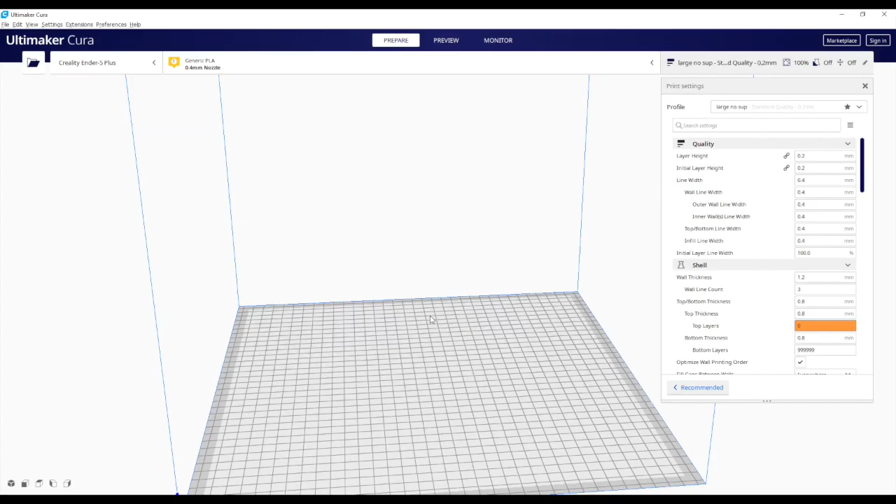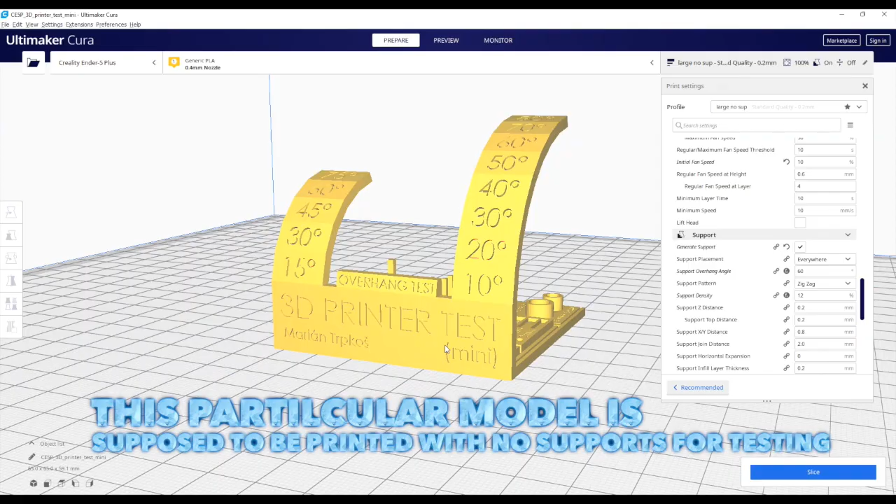Today we're going to learn about support materials and what is a support material. Alright, first we're going to open this test right here. So this is a file I got off Thingiverse. It's basically something your 3D printer can print out, and you can just test out stringing, supports, and I'll go over what everything is in a few seconds.

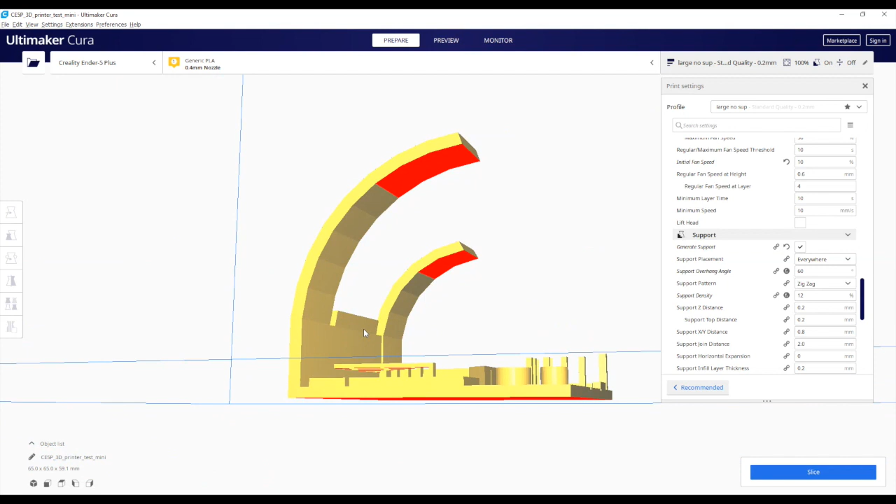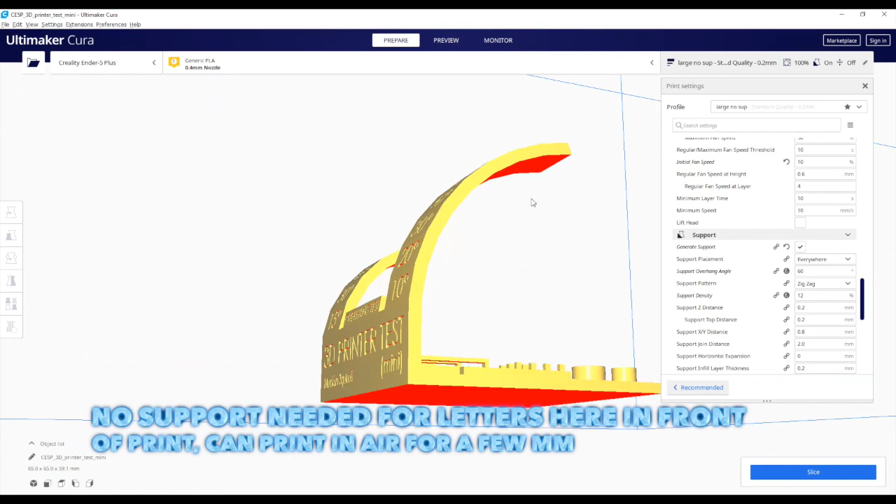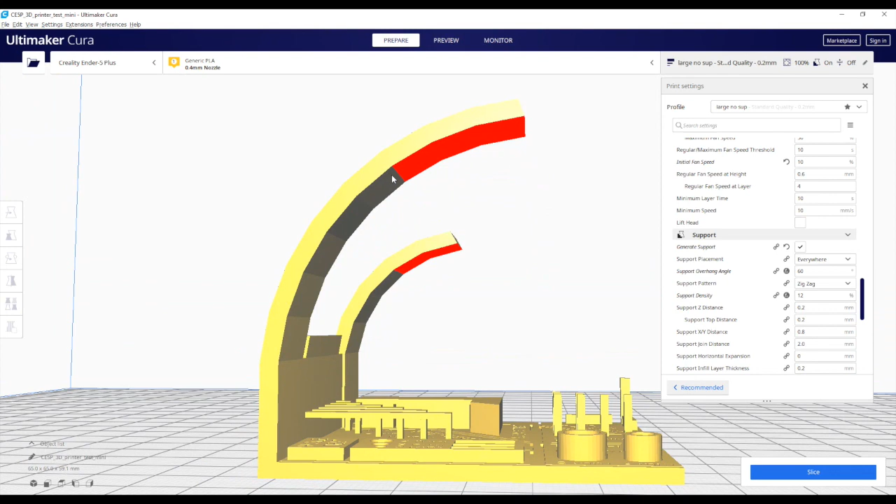So basically the 3D printer is pretty impressive. Like the one I have, the Ender 5 Plus, it can actually print up to 60 degrees right here in the air, which is pretty cool because all of this doesn't need any support material. After 60 degrees though, I've noticed that it does start to fail and warp and disfigurations, and basically it's printing in the air. So it's not getting attached to anything. Here it's getting attached to the last layer, but in the air it can't really do that.

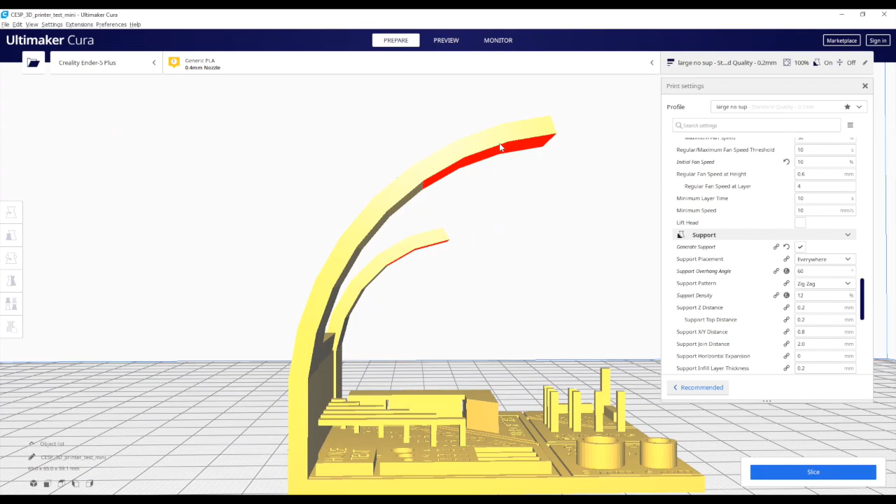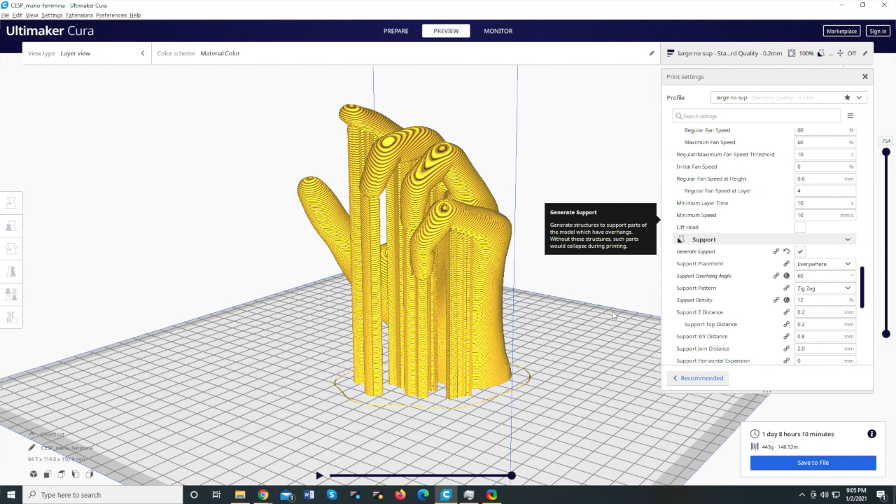So basically you need support material anytime you're printing something that has nothing under it. So basically on a helmet that would be the ears. There's nothing on the side of the ears, so it's going to need support material. On a hand, let's say it's facing fingers up and then just bending them slightly. That'll be the support material I show in the picture. For each of the fingertips, they're going to be in the air. Then that's what support material is used for.

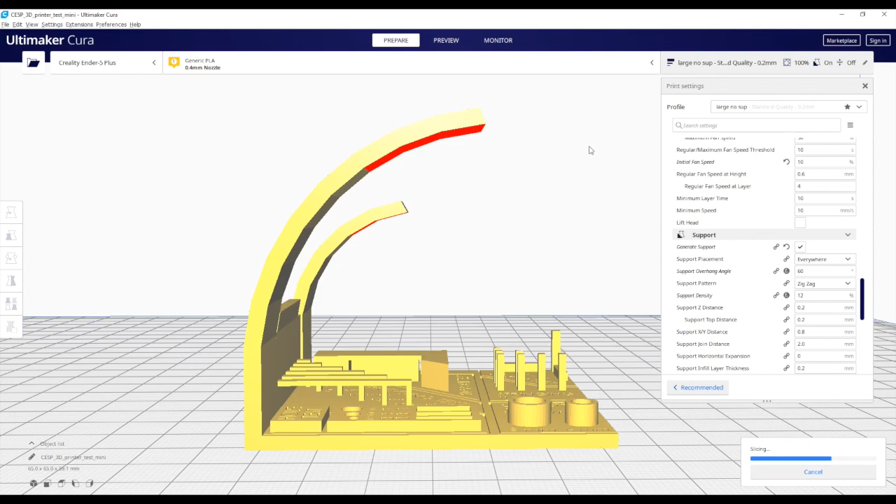Where else would you need support material? Basically, a lot of the prints have support material. But basically what support material is is just supporting the layers that have nothing directly below them, so it can print nicely. So we're going to go ahead and show you exactly what they look like once this is set up. Preview. So this is Cura showing you all the layers it will print in fine detail. So each one of these yellow lines, ignoring the shadows, is each layer.

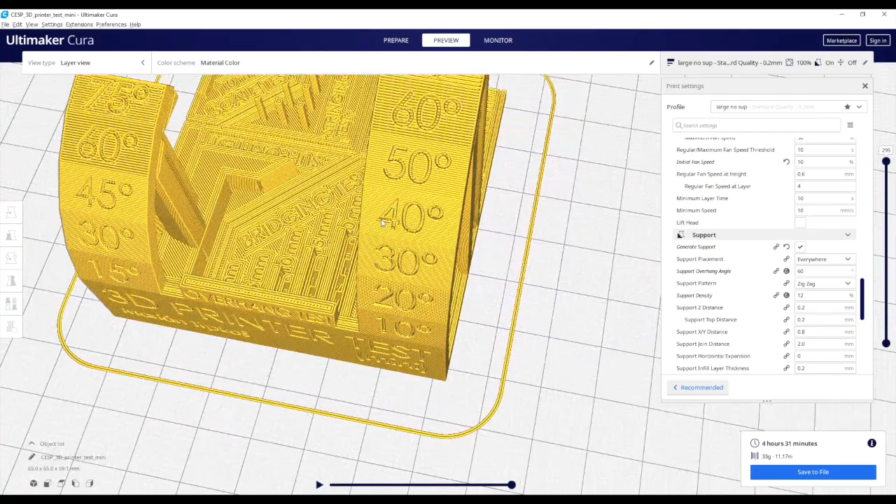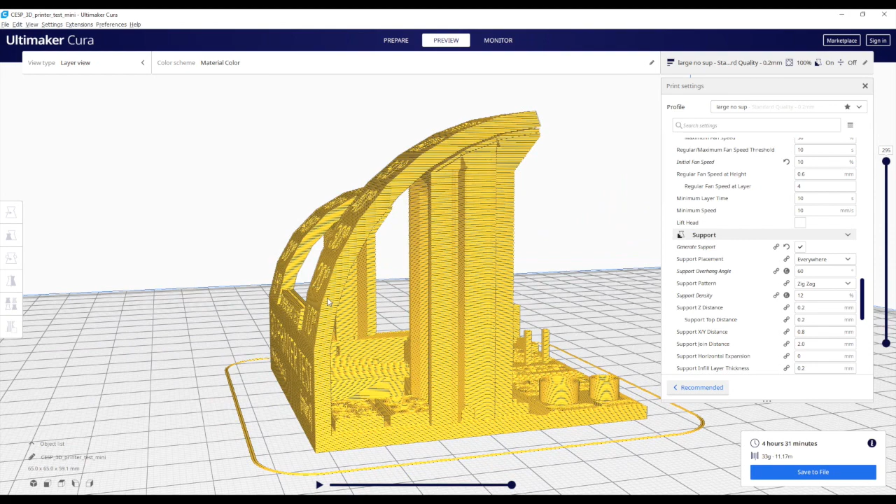So right here you can see that they've nicely put the angles at which this is in the air, compared to straight. 0 degrees would be this straight up, and then off to a little bit it's 10 degrees, 20 degrees, 30 degrees, 40 degrees, 50 degrees, and then 60 degrees. So basically these are the angles away from this 90-degree invisible line that goes straight up and down. So anything after 50 to 60 degrees, you're going to want support material.

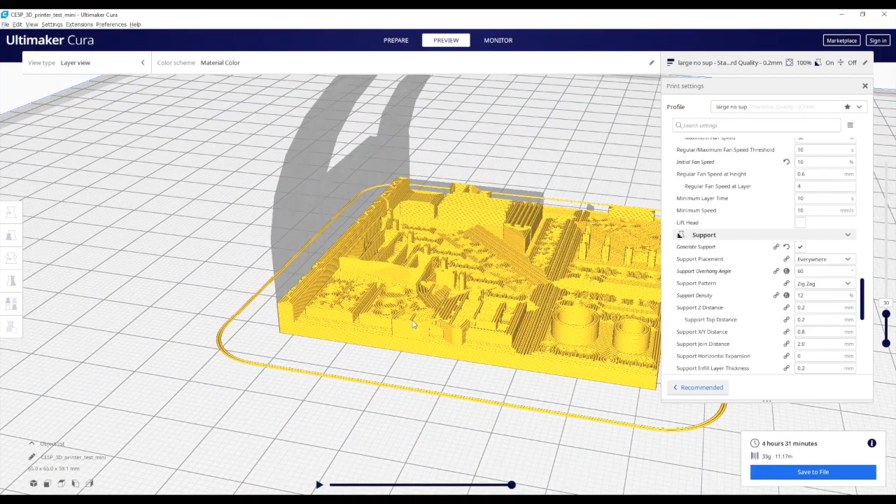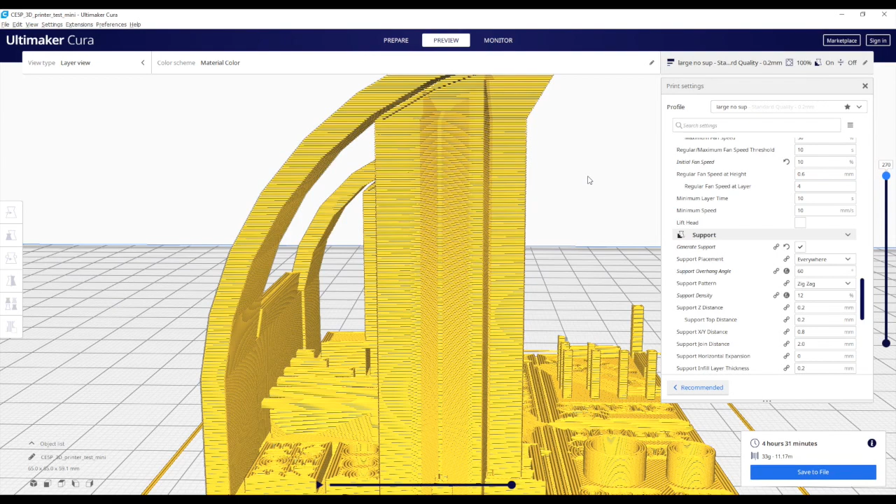And let's take a look inside the support material so you can better understand how it's helping the 3D model. So right here you can see the support material is really just a hollow shell with some lines on the inside to give it some rigidity, so the layers on top can actually print on something solid. So basically what happens is your model gets printed at the same time as the supports, and what the supports do is, like they're called, they support the model on any parts that have nothing directly under it.

So basically right here, if I deleted supports, imagine this was gone. Each one of these layers would be connected to nothing. And what I mean by that is that the layer I'm pointing at right here would start printing in the air because there's just nothing directly under it. So basically gravity would win here because the material is so thin, and it's going to start printing in the air because the last part that had some good adhesion was at this 50 degree, almost 60 degree angle from this line. So basically support material lets your printer print things in the air. Pretty impressive.

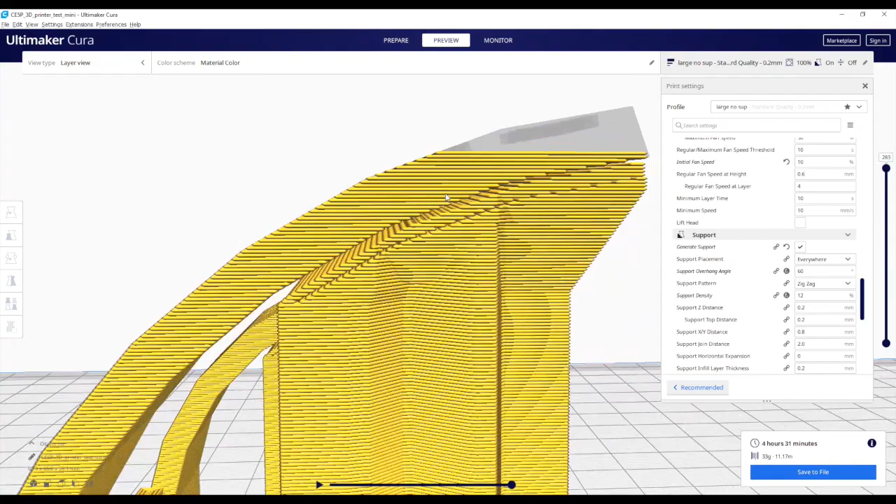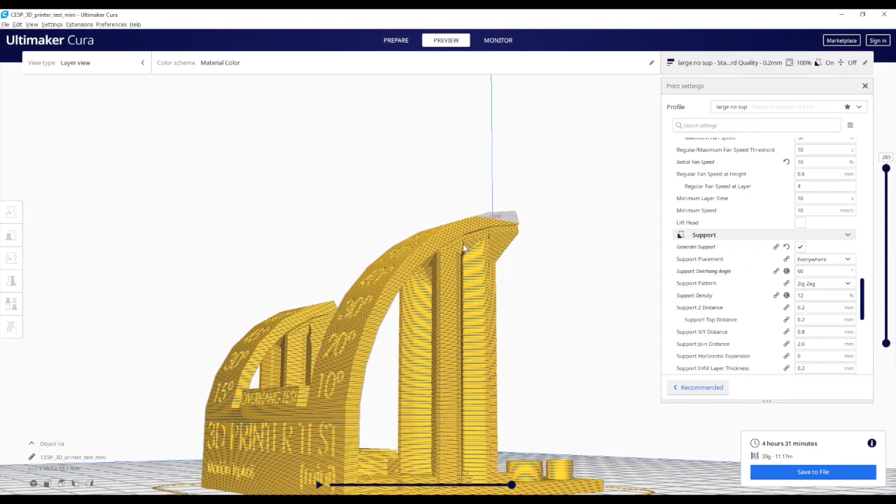We're going to go over some settings because the support material is also something that you guys will probably hate when you first start out. Most of the time when you get started, the support material gets so stuck to your print that the print becomes unusable, because you try to rip the support off, and the whole print that you actually wanted to display or use gets ripped off as well. So we're going to go over a few settings that can probably help you out with that. Alright, so right here you notice there's a little gap.

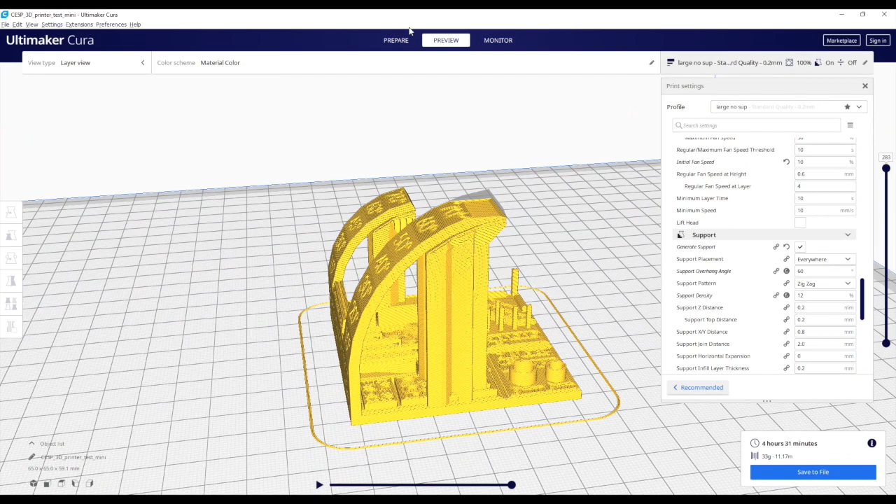This gap is 0.2 millimeters thick, and I know it doesn't look like that here, but I'm really zoomed in. This is actually a really tiny print. But yeah, let's go back to before the preview. So right here you can see this is the top of the supports. What you don't want is your supports to weld themselves onto your model.

So here we're going to go over the settings. Here in the Cura settings, I'll make another video going over all of them. They're pretty self-explanatory, but there are some special ones I want to talk about in the support section. My next video will probably go over all the settings, but this is something most people don't take into account when they're printing their first prints.

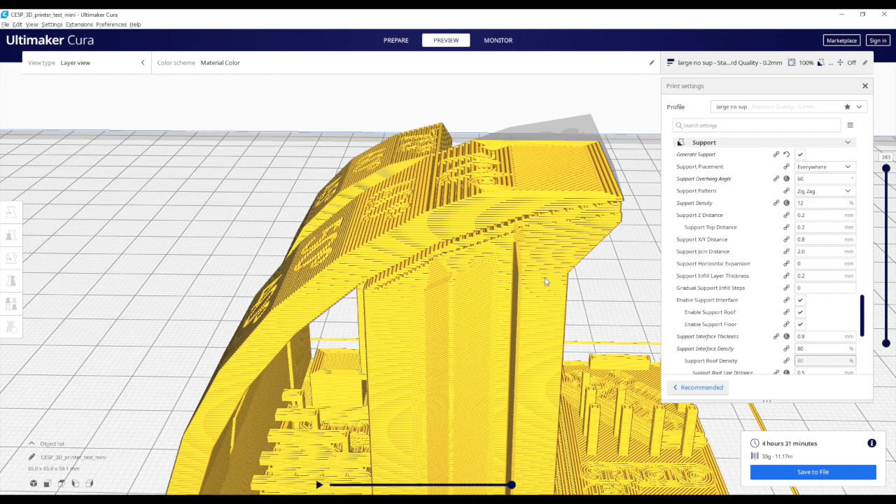Okay. On the supports, I have some extra lines just from the additional settings right here, because I like to be in control of a lot of the stuff in Cura. Once you fine-tune things, you can make profiles, and each of these profiles can go for small models, large models, so you don't have to really mess with them more than once.

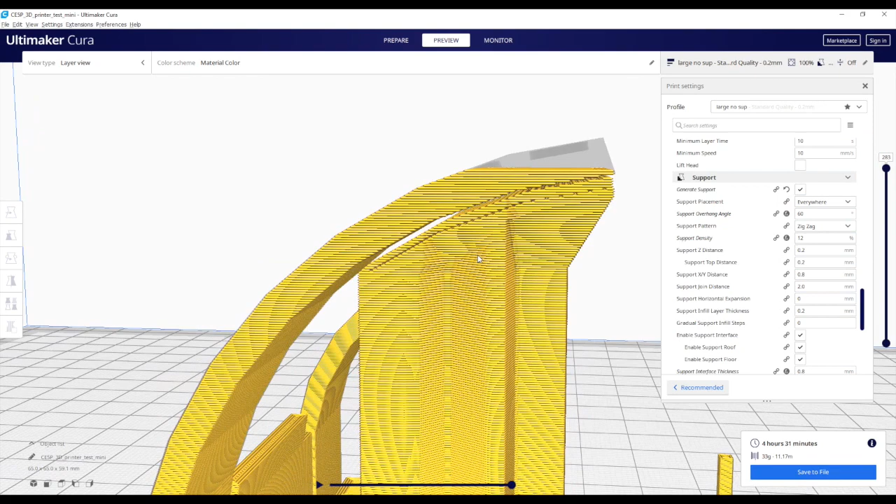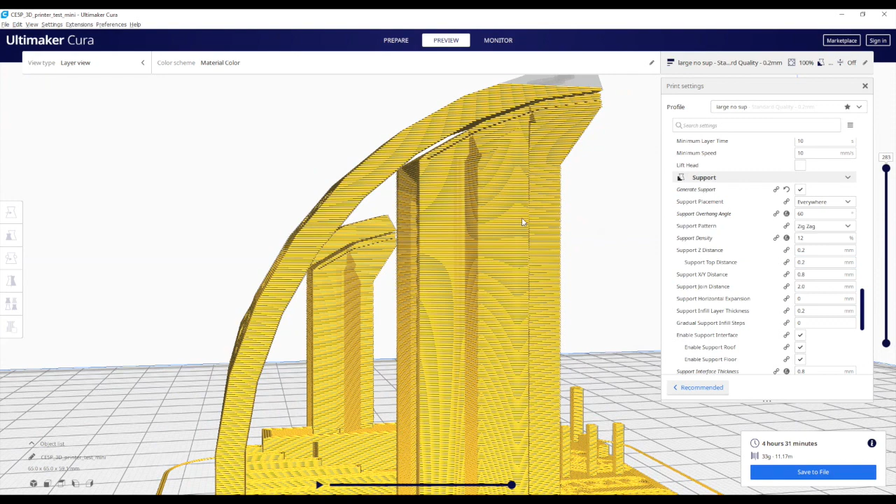So, support. Generate support. On some models, and I'll display one in a few seconds over Cura right now, you don't really need support material because the whole model has angles in the air of less than 60 degrees. So basically, how you find out if your model can be printed without supports is you go to support and change the overhang angle to 60. Once you do that, you'll notice if your print needs support material or it doesn't.

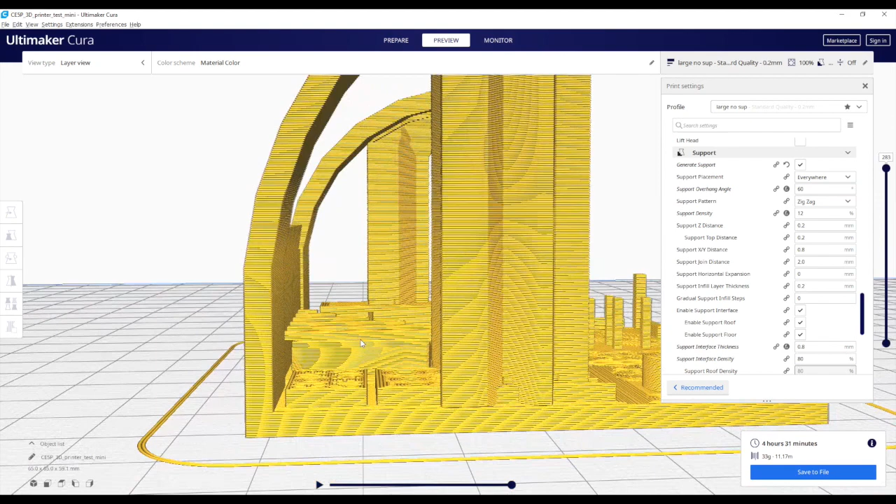For example, let's say I lowered this to 40. Slice it one more time. Remember, our supports were here at the 60 degree angle mark. Now you notice that there's more supports. Why is there more supports? Well, you just changed the angle to start supporting material to 40 degrees.

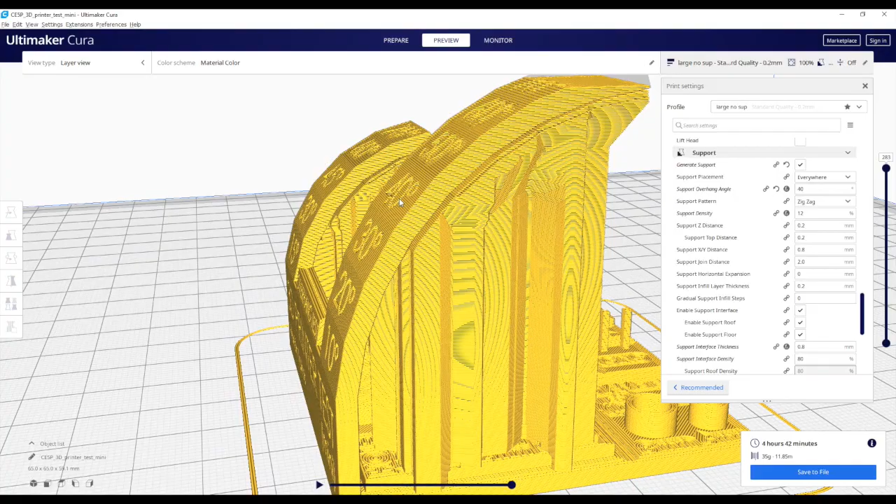Now here, you don't really need support material, and you can print this test without support material just so you can see what your printer is capable of. For most printers, I think it's about 50 to 60 degrees that you need support material after that, but they do pretty fine at 40, 50, and maybe 55 degrees. So basically, that's what your support angle does. It tells Cura where to put support material. So let's go back to 60.

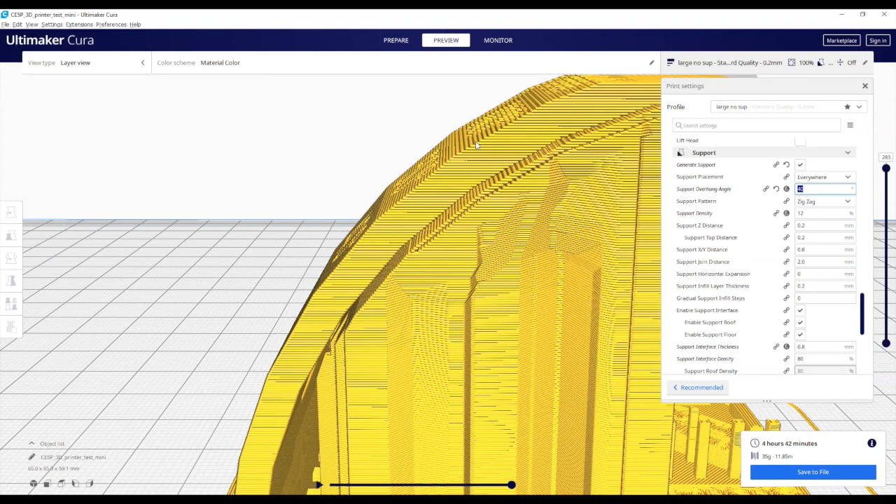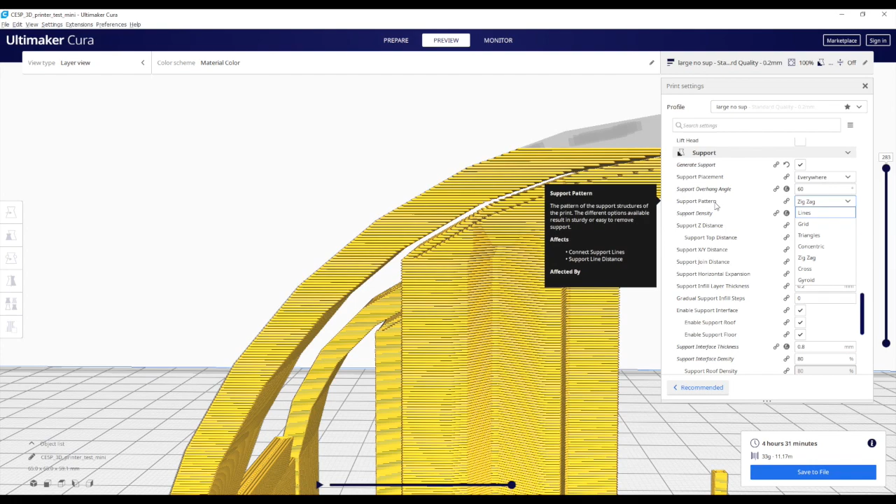Alright, so we're back at the 60 degree mark. Let's go over the rest of the settings. The support pattern doesn't really matter. This is the pattern that goes inside your supports. If I cut it again down the middle, see these lines? It's just the shape of these lines. Zigzag just means it's going up, down, up, down. I noticed that's the fastest because the motors move more easily in one direction than creating a spiral. You can experiment with your own, but I've always used zigzag, the default with the support material.

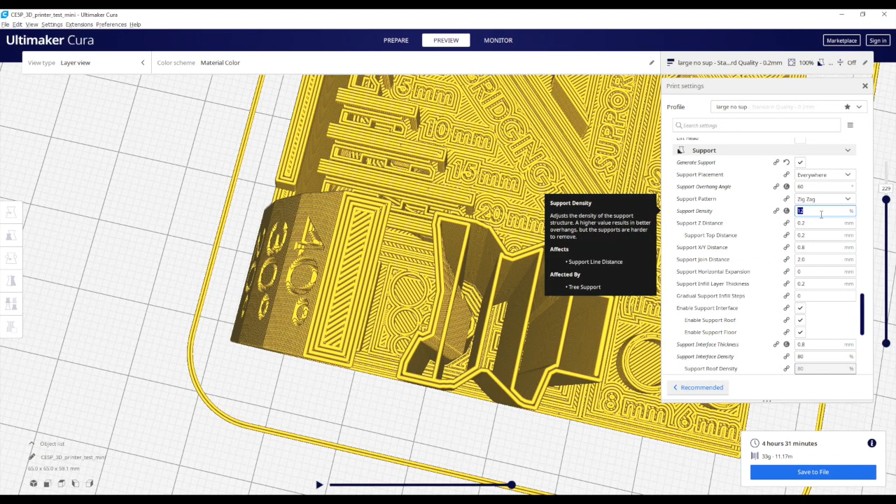The next one is support density. If you want your supports to come off really easily, I would keep this number low. There's no reason the piece you're going to pop off the model should be as thick as the model. So I usually keep my support density between 10 and 15. I've noticed if you lower it less than that, this is what happens. On tall pieces like this, it gets so thin that it starts to not really be straight up here.

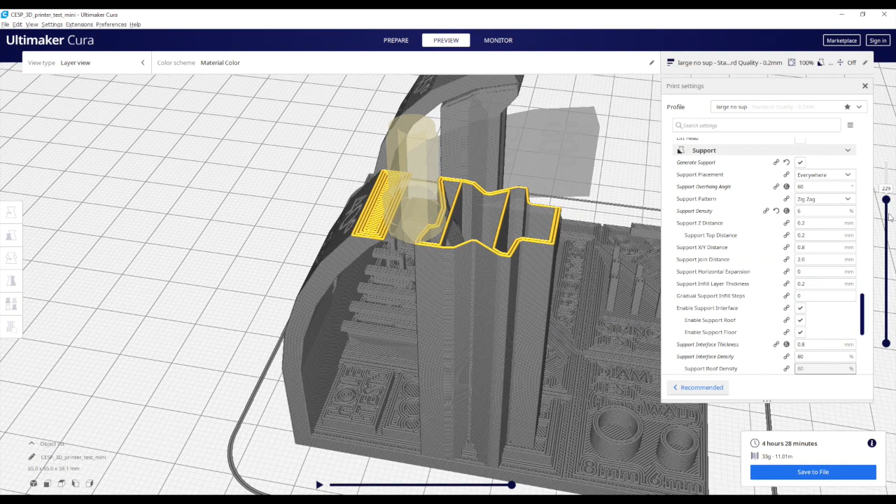The heat of the bed starts warping it, and as it cools, this is warmer than up here. So if anything shrinks down here, this top part is actually going to be over here slightly. You'll notice that it won't print directly above it if your support density is too small, because each one of these lines is 0.2 millimeters thick. So don't go too low with that. Let's go back to, what was it, 12?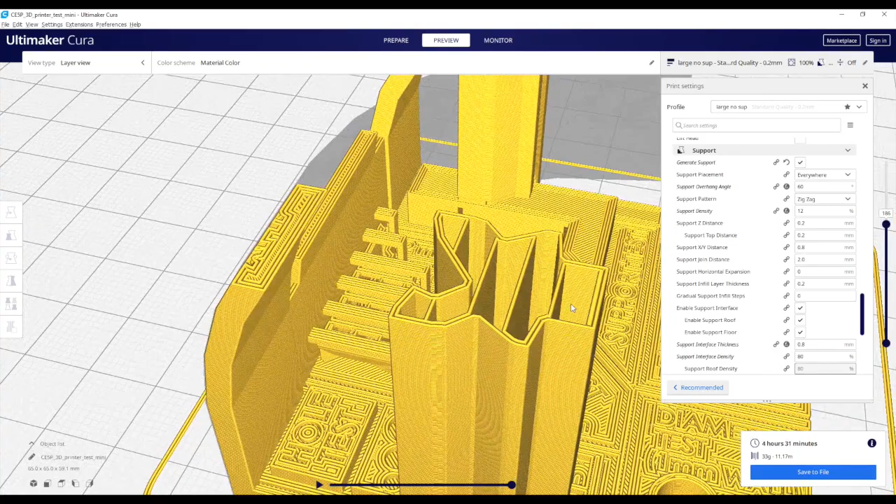Alrighty, we're back at 12. See, this is a lot better. If I had a measuring tool in Cura, you could see that this is actually like a centimeter, and before it was like an inch apart. So it keeps its shape better with the higher support density. But there's no reason this should ever be over 15 unless you have some really big supports that you need.

Support Z distance. Like it says right here, this is the distance from the top or bottom of the support structure to the print. This gap provides clearance to remove supports after the model is printed.

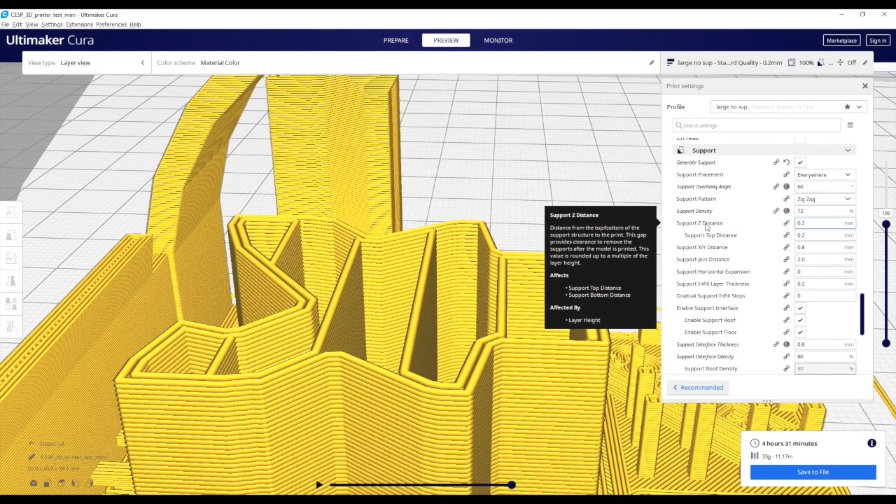These supports aren't going to stay there, and you'll notice that the first thing you do when you take your models off is to remove the supports. So what you want is a distance between the support and the model. And you might be asking, wait, then what's the point of the supports if they're not really touching the model?

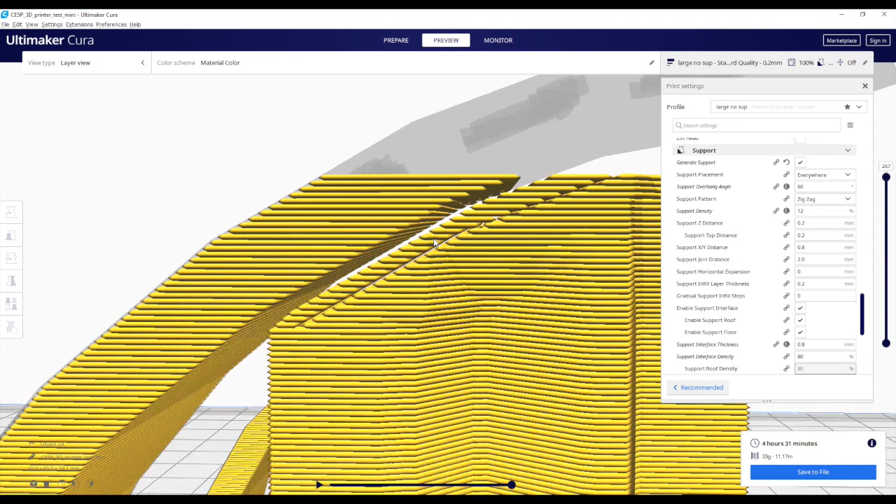The thing is, gravity is actually pulling them down ever so slightly. So every few lines will make just enough contact with the support so it won't really droop into the air. Think of it as a spot weld. Gravity will make these little spot welds between your model and this line that will basically keep your model's shape. So that's what the support material does. At least that's how I use it.

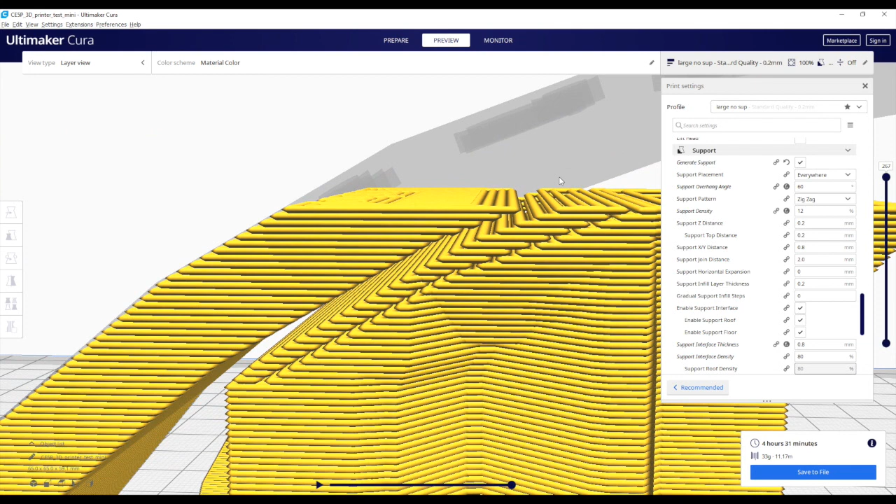So when you go to take it off, there won't really be a gap here. Gravity will cause these parts to actually join ever so slightly, and when you pull the support material off, the gap that is in the rest of the non-spot welded spots will be enough for it to pop off, theoretically. It doesn't always work out like that, but that's how it works. Support top distance. This is basically the support Z distance, but it's a little bit more specific. This is the top, so this right here.

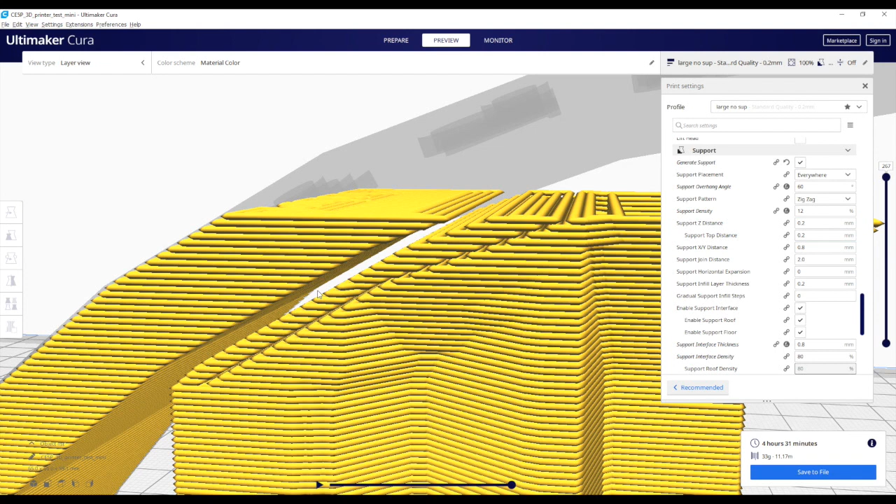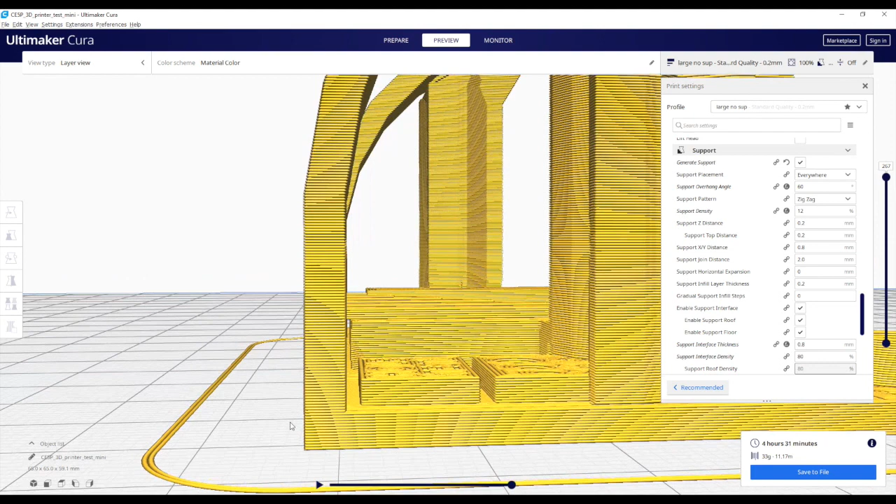Support XY distance. I keep this higher because you don't ever need supports for X and Y. You want to know why? This should be self-explanatory, but I'll explain it either way. That would be like having support material on this vertical column. This has enough adhesion to the bed that, of course, you don't need anything next to it. So your X and Y distance, I would keep pretty high. I have mine at 0.8. You could probably go higher, but that's how I have it.

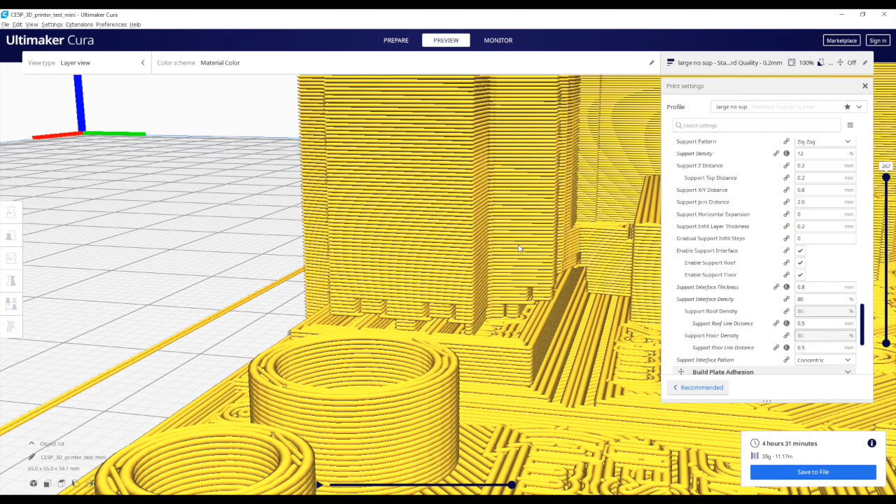Support infill thickness. This is the thickness per layer of support infill material. So this is basically the layer's thickness. I would probably keep it the same thickness as the model, or else your bed's going to have to keep moving up and down to compensate for this layer thickness and your model layer thickness, because it prints one line at a time. So that's what that is. I wouldn't change that. I haven't really messed with gradual support.

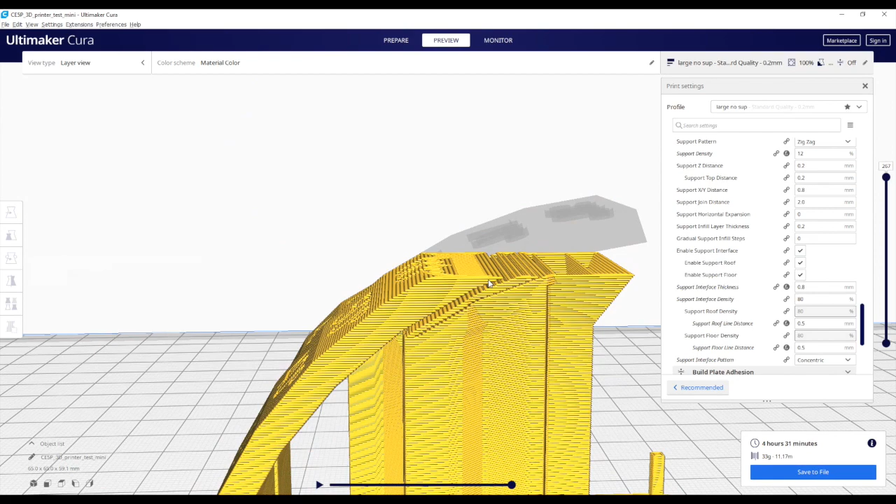Let's go over a more important part. Enable support interface. Basically what this does, it makes a little bit thicker material right here, closer to the model, than the rest of the supports. To see this a little bit more, we'll take a look inside here. This is the inside of the infill for the support. You'll notice that there's big gaps between. That's because it can print bridges, which is basically a line over nothing between these support lines, a lot easier than printing in the air. So this prints in the air maybe a centimeter and then attaches itself to this point.

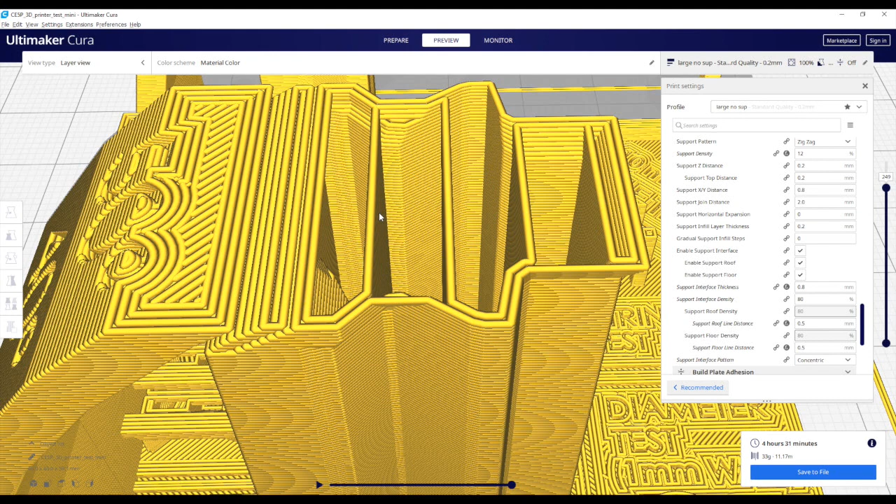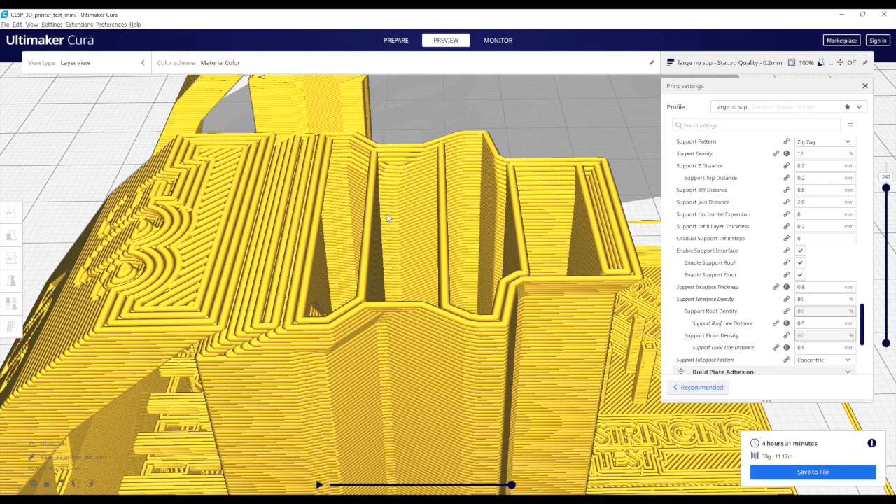So that's enough support line. That gives it enough adhesion to not fall down and quickly connect to the next support. Think of it as the liquid plastic solidifying really quickly because of the 3D printer's fans. Basically like a 3D pen, I don't know if you've seen them, they actually print in the air. This prints in the air, dries, and it does it at the right moment where it doesn't let gravity affect it. So basically that's what that is.

This interface though, the top of it, the part that touches the model, you want it a little thicker, because if these spot welds turn into full welds, like full lines connected to the model, you'll have a really hard time peeling the support off the model. Since the model is thicker in infill than the support, let's say this is 12% and this is 15%, they'll be so close that maybe this part of the model will come off when you pull off the support.

So what you want is this interface, which makes a little thick layer of the support right next to the model, so it can keep its shape better, and it won't warp like the rest of the support might, to give it that rigidity. So when you're holding the model and the support and you pull them apart, they have a breaking point. You want the breaking point to be right here between the two thick layers. This layer is thick, there's a tiny gap here, and this layer is thick.

If this layer was thin, the support will probably come off in small pieces and it'll take forever. But if you make the interface thick enough, what's mine at? 0.8 millimeters. If you make it this thick, then the crack when you break the supports is going to happen at the area of least resistance, which will be these spot weld parts that I talked about earlier. So that's what the support interface is. It just gives it a little bit of thickness next to the model, so it'll have a breaking point.

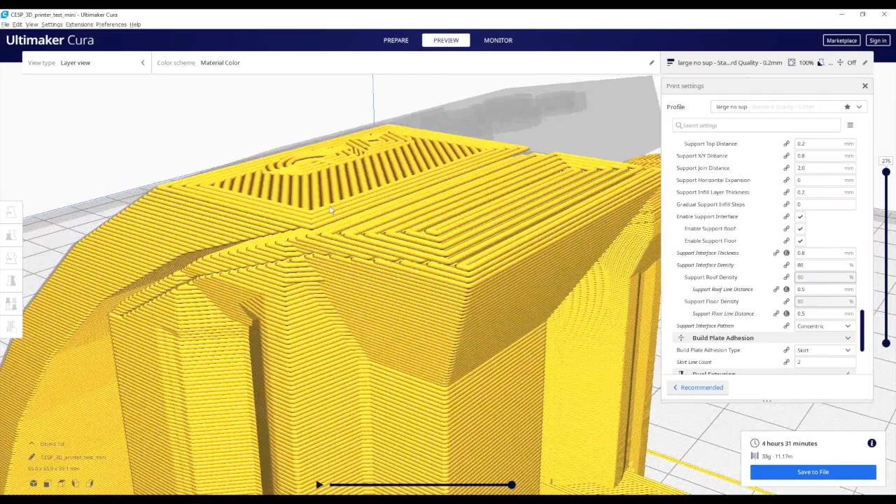Interface density, it doesn't really matter. I have mine at 80 just so I have a quick snap off, because I like my support snapping off ever since that problem with a Gundam I had, and you've probably seen it in my other video.

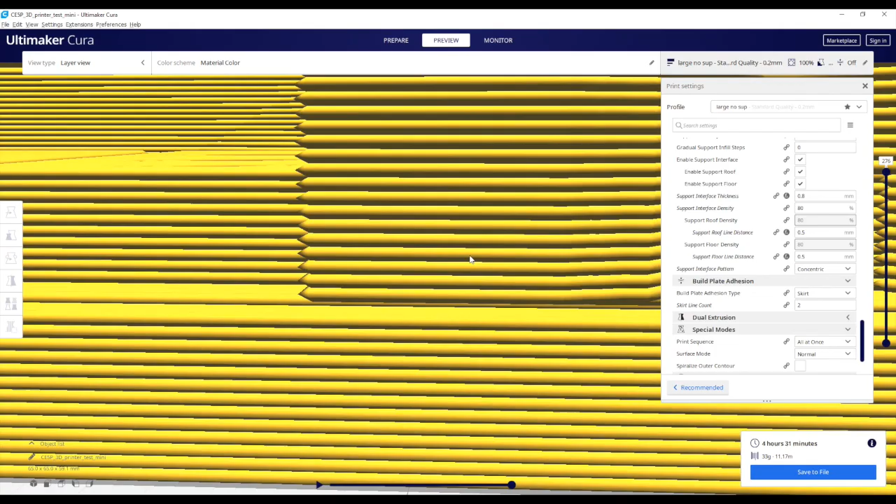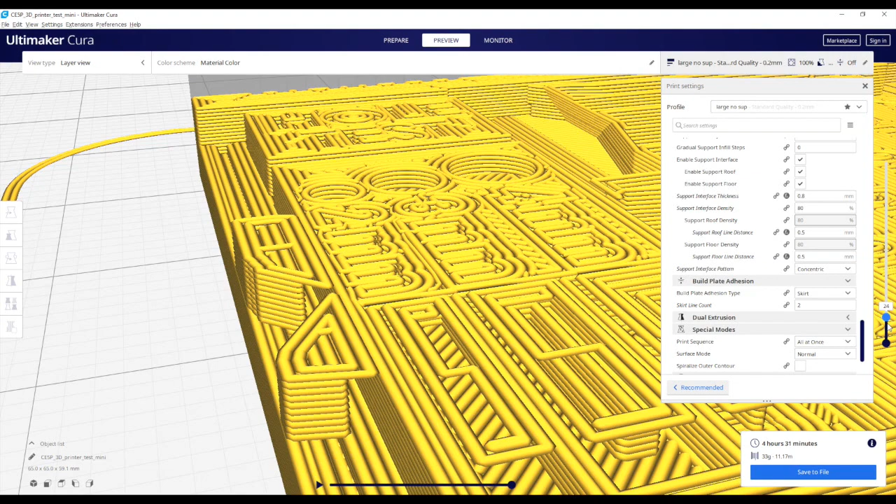And support floor line distance, so this will keep some spot welds down here as well, so they won't stick to the bottom of the model. This isn't a really good picture. Let me see if I can find one. You can't really see it, but trust me, there's a little gap in between the model and the lines. It's really hard to see, but there is a gap, at least inside of the support. It's like it skips a layer. There we go. Skips, and then there. That's the gap it's talking about. So basically, it won't stick to the bottom of the model either. That's what this is.

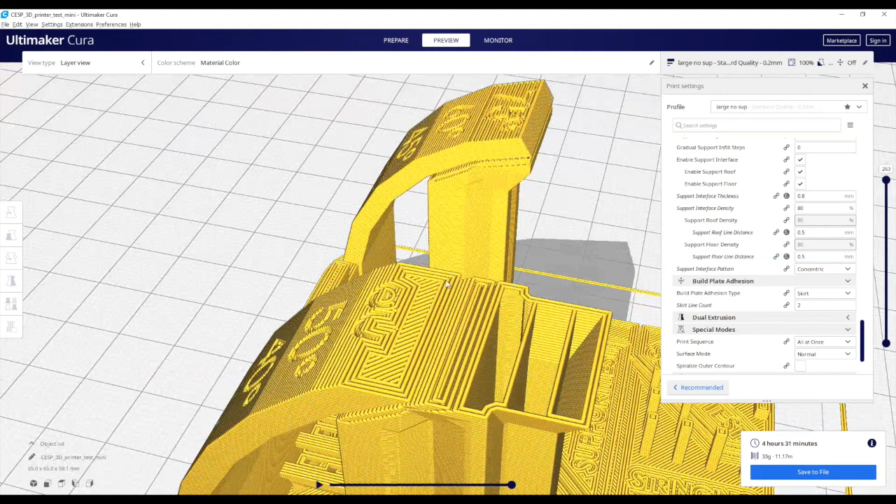And one last thing, support interface pattern. I like concentric because I feel like when I'm pulling off the support, this printing in a circular motion doesn't give it a starting point or ending point like a zigzag line does, because when you're extruding and you stop and you move and you stop, if that happens more often, then there's points that have a little bit more extrusion than others.

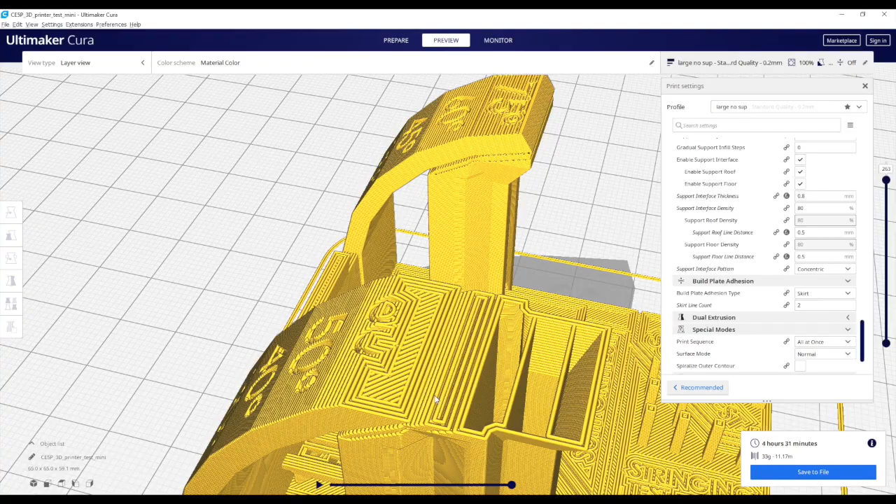And concentric, it doesn't ever stop. It just keeps moving and moving. And zigzag will go like this, stop, go like this, stop, go like this, stop. So concentric, I think it's a lot better for support interface.

So that was my video on supports. I hope this really helps you. I wish I had this video available when I was learning about supports. I've been 3D printing since 2009, but that's back in school.

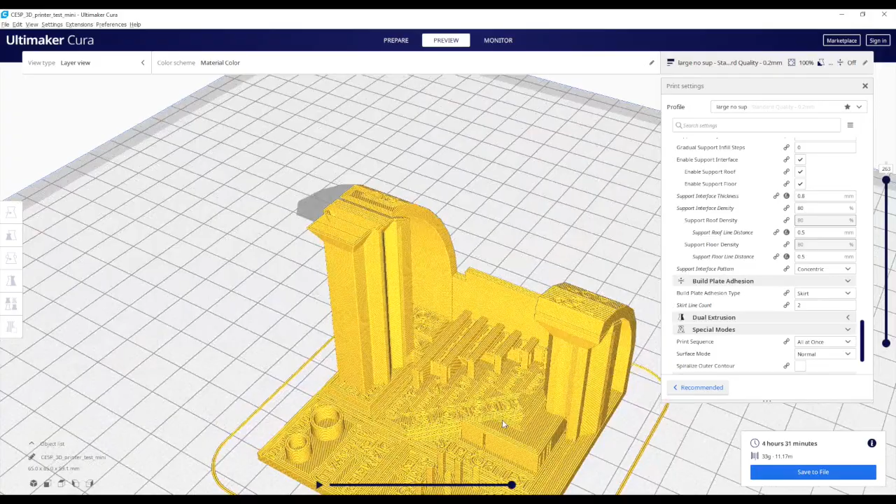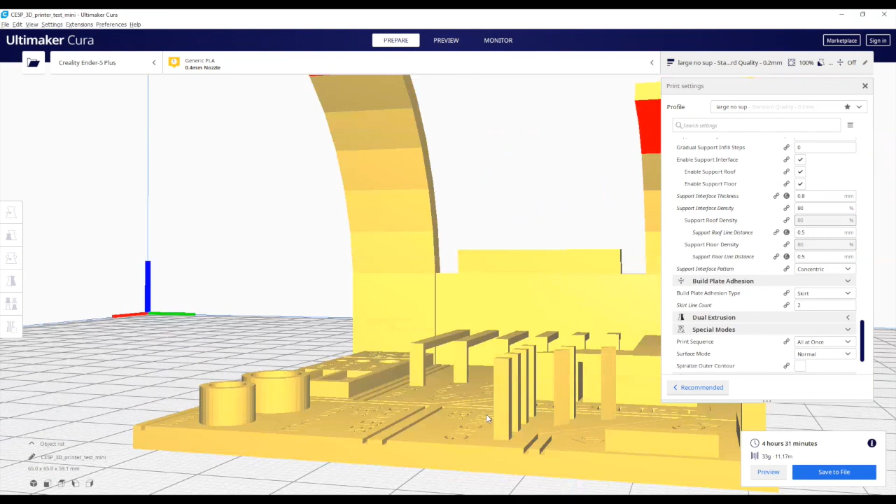And oh, one more thing before I go. These bridges down here, I want to go over them. So see, this is a little test I got from Thingiverse, like I said, that whatever comes out of your printer is where you can make some fine tuning. So basically, this is a stringing test. It'll print these little columns, and if you notice any string, you can adjust your... I'll go over all the other settings in my next video.

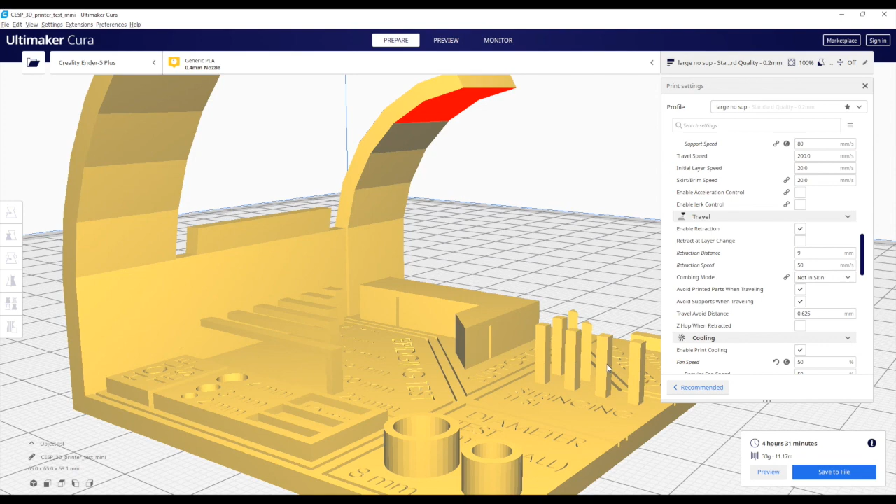You're just gonna adjust your travel and your retraction. Basically, what this does is backs up the filament so it won't ooze out while the printer head's moving. So if the printer has to move here to here and it doesn't retract, there'll be a tiny little line here caused by gravity and the plastic melting that you can adjust in these settings.

So one other thing I wanted to go over, these bridges, of course they're going to need supports, but what this is doing is it's showing you how well this prints without supports. So these will probably be fine because of the plastic solidifying in the air with the fans, but these might start to look like crap.

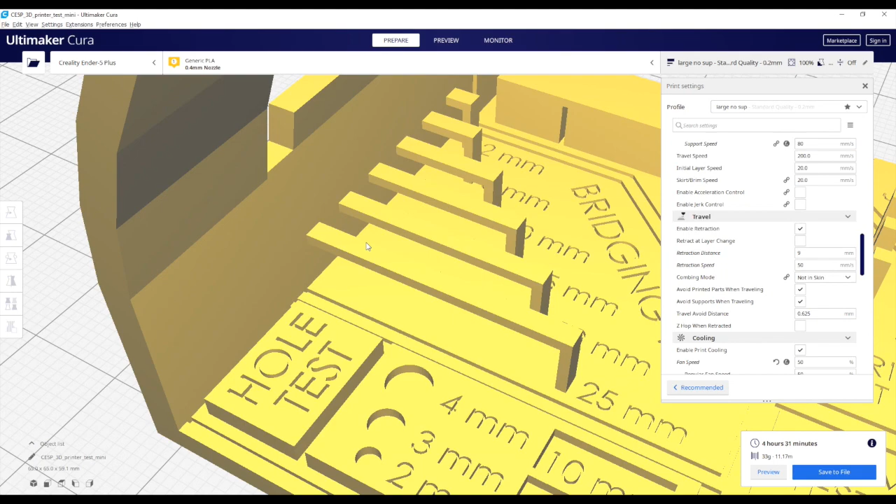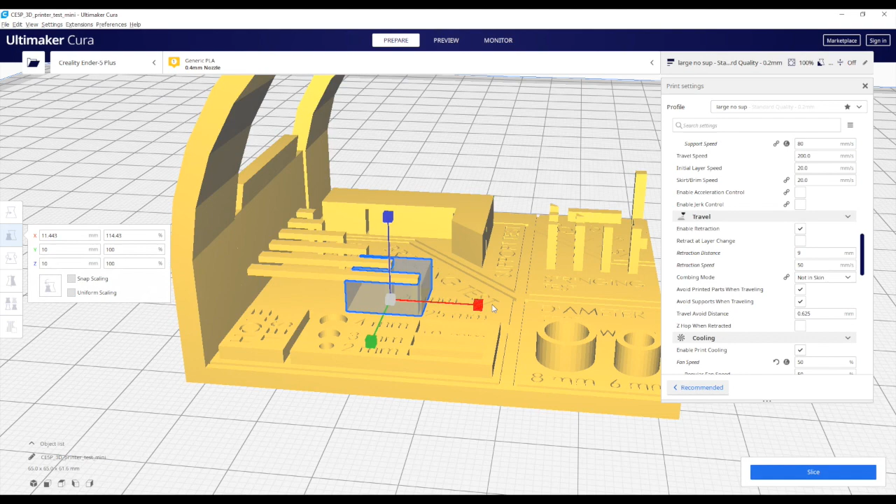The way you remove supports from a model, that's what I wanted to go over before we go, is you click the model, and down here, we'll go over all these settings in the next video, down here there's a support blocker. You basically just select that and select where you don't want supports. And let's say you don't want any supports down here. You select it, you go back to scale, do non-uniform scale, move the size of the place you don't want supports, because we still want supports up there, but no supports for anything in here. And then you just press slice.

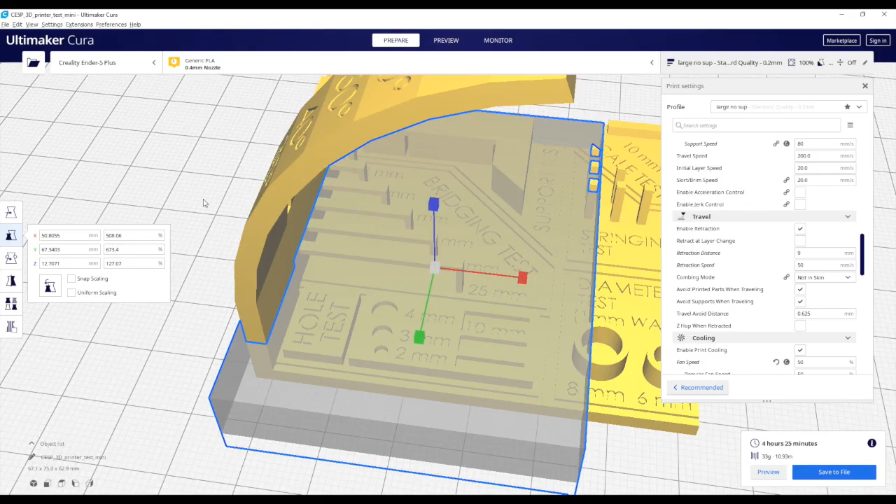And that's basically everything in supports. I hope this helped you guys a lot. I know it's going to help you a lot because I wish I had this video available when I was learning. And I made this a long video because I wanted to go over in depth what each one of these options do for supports. And I'm pretty confident that I went over everything for supports.